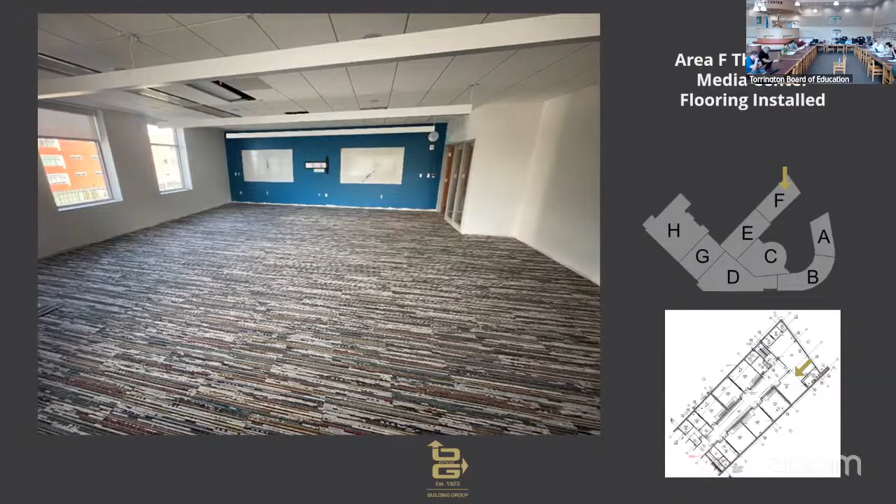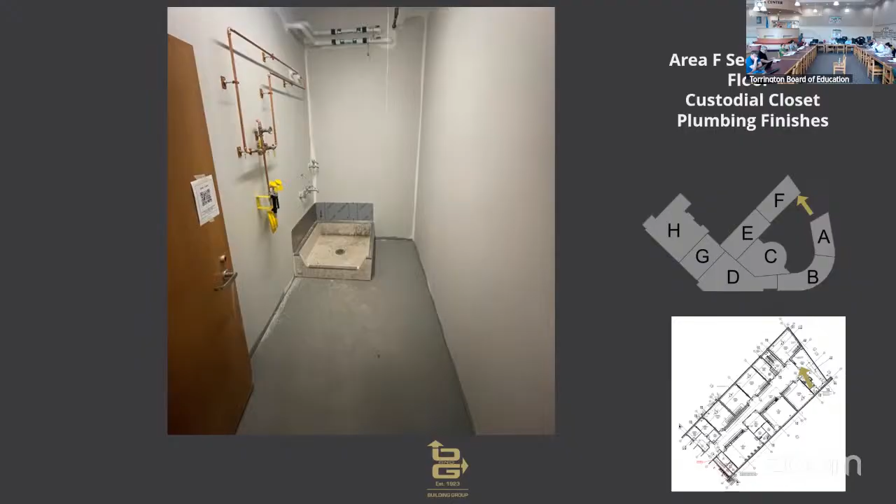We are final cleaned on the second and third floors in the middle school. What you're looking at here is the carpet installation in the presentation class zone area in the media center on the third floor. It's actually the same carpet that was installed in the high school media center, but the carpeting is complete and the final base work remains in progress. Next slide is showing a typical custodial closet with the mop sink and the eye wash station. The work that remains here is the insulation jacketing on the exposed copper piping, the vinyl base, and the mop holder accessory. As I had mentioned before, final cleaning is complete on the second and third floors.

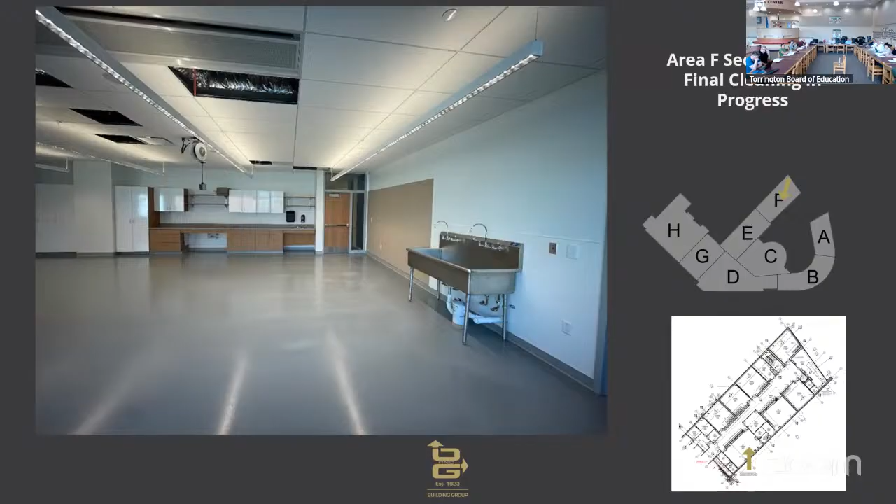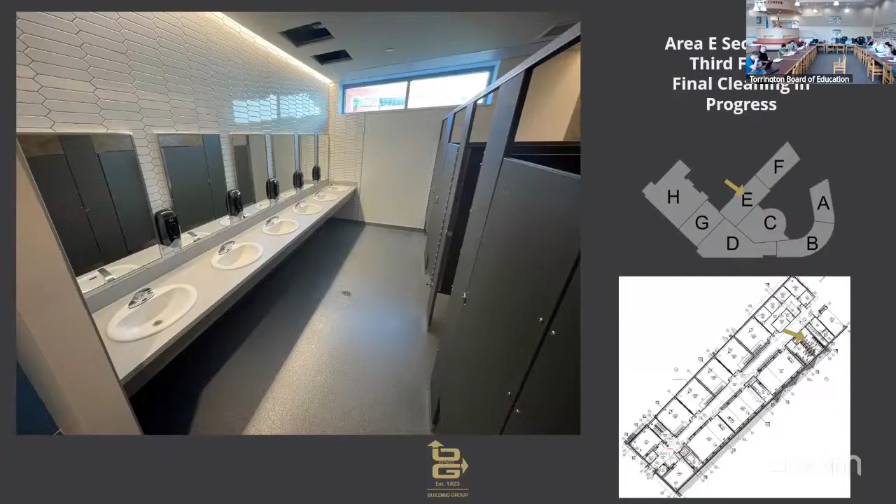Here's a picture of just the recently cleaned art studio classroom on the second floor of Area F. And the next slide is showing the community restroom on the same floor in the same area. Just for a real-time update, the window contractor, Cherry Hill, has also begun cleaning windows on the inside of the building as well. Flooring installations have progressed significantly in the middle school. The picture here is showing completion of the corridor flooring on the second floor, and it's the same condition the floor above, minus the vinyl base installation. As of today, the corridor flooring on the first floor has approached the vestibule area and is nearing completion. Also shown in the picture here is the completion of the acoustical ceiling tiles on the second and third floors.

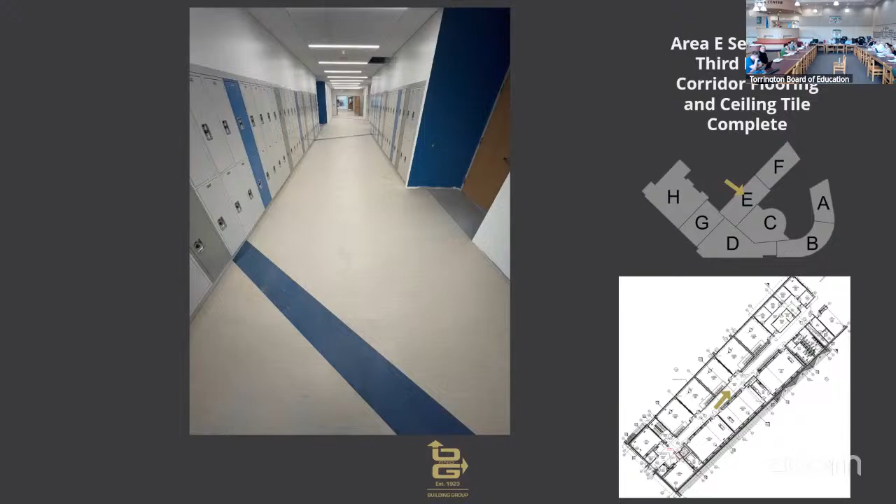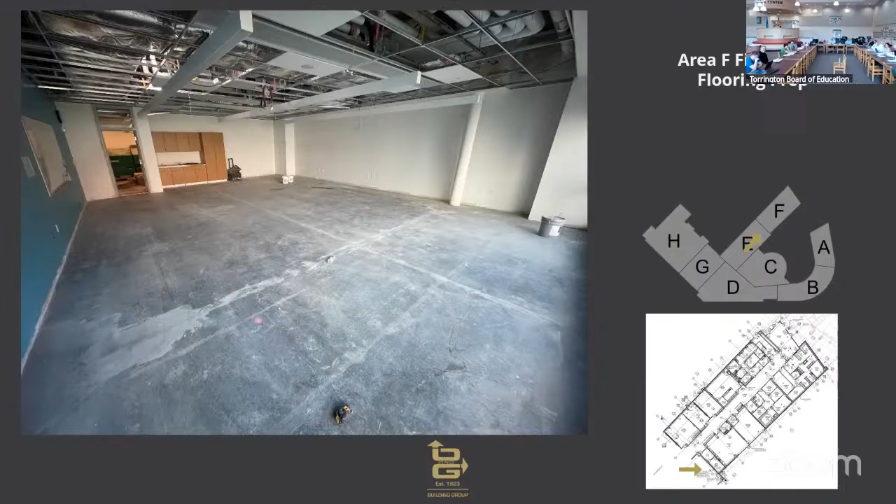Yesterday, we received approval from the local building officials to pad out the ceilings on the first floor of Area F. That's the last area that we're seeing out the rest of the middle school. So those ceilings will begin to close and final cleaning will follow, along with development of punch list and completion of punch list. Next slide here is just showing some floor preparation on the first floor of Area F classroom. This room is actually complete as of today's date, but the picture was taken at an earlier date. Just showing some more progress there.

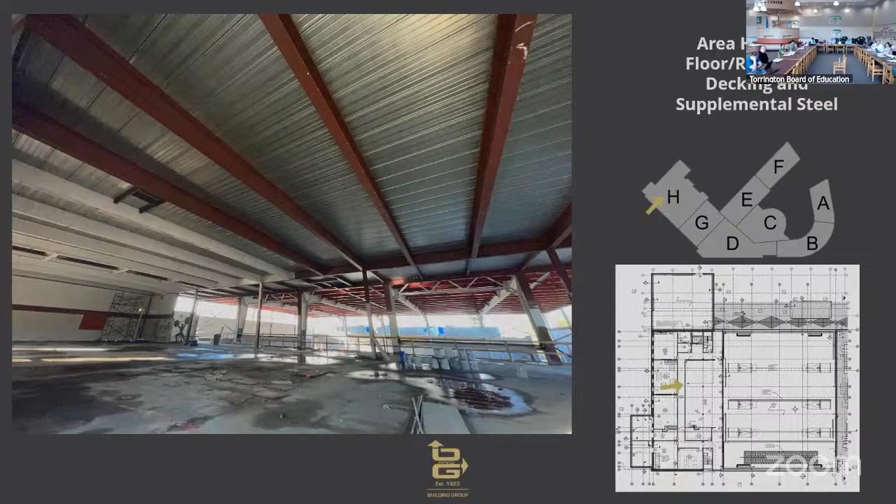Moving on to the final new concrete foundations for the project. Here's a picture taken looking down the gym lobby corridor, and the basketball base is located on the left side of the page. You can see it kind of jogs out. As of today, the slab for the gym lobby continuation and the auto shop is scheduled to be placed next week, weather pending, and the final new structural steel will start next Thursday, the 22nd. Again, just more major milestones happening in real time as the project progresses forward.

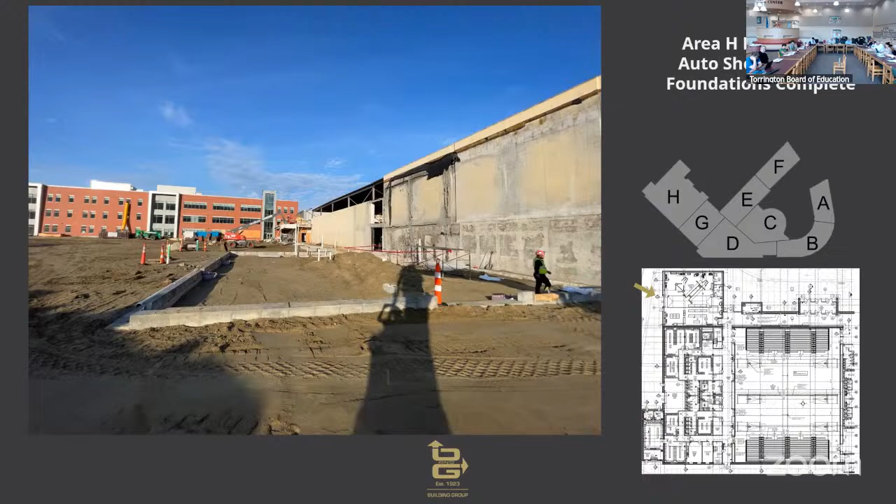Here's some progress showing athletic field topsoil stripping looking north. Lots of topsoil piles scattered around this area, but the city is actively loading and hauling out the excess.

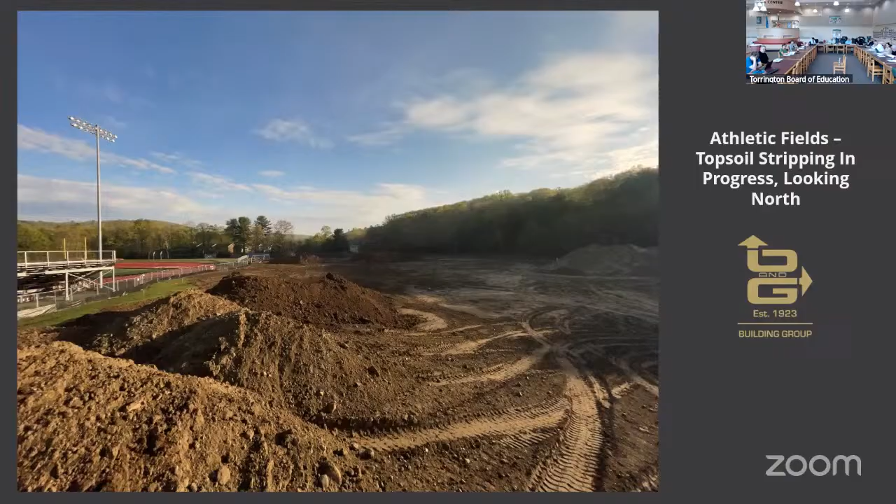They're gonna take it off? Up to this point? Until they cry uncle. Yeah. Okay, right on. Well, I didn't know if we're gonna take it all or up to a certain point, because that's a lot of topsoil. Yeah, to clarify your point though, not all of it goes off-site. What we need to keep on-site for the future work stays on-site. Right. I'm talking about the excess. Yeah, that's all going. Okay.

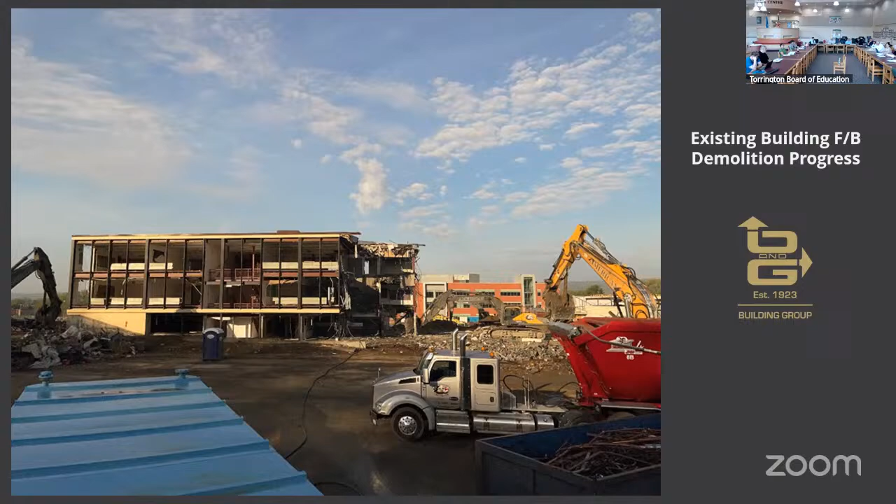Just to report on some cost impacts within the period, at time of bid, the general trades contractor was assigned with replacing the existing concrete slabs that were required to be removed in sections to facilitate the new underground plumbing piping in the existing locker room area. During removal of the concrete slabs, we encountered some unforeseen conditions related to the existing tunnel system that were not identified on the structural drawings, along with being left with slivers of existing slabs that cannot be doweled into without busting it apart, to tie in the existing slab into the new replacement slab.

Ultimately, the scope of work went from a trench replacement to a slab replacement, so changing the responsibility from the general trades contractor to the concrete contractor. Order of magnitude for the scope reassignment is around $30,000 being applied to the CM contingency fund.

I briefly touched upon it there, but we're continuing to battle with time and recovery related to the turnover of Area H. As I had mentioned during last month's committee meeting, we got off pace with the demolition handoff to the successor trades that are following those activities. Concrete and steel subcontractors have been working premium hours over the last month to gain as much time as possible.

Unforeseen conditions related to the tunnel closure walls, like I had mentioned, have consumed a lot of time, delaying slab placement until tomorrow, which was a few weeks over what we had originally anticipated. More unforeseen existing conditions are being resolved in communication with SLAM's structural team. A few others to mention were the discovery of the undersized steel beams in the old concession bump out area. The drawing noted the existing beams were larger than what was discovered in the field.

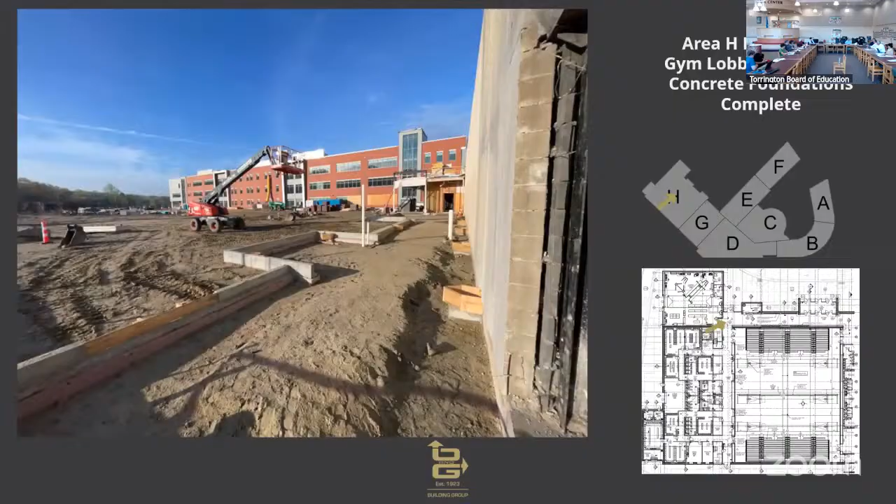What we're very excited about, frankly, is that we'll see a slab. We opened up that building. It's been open in those trenches that you saw in the pictures. That's the multi-layered storm and sanitary piping that's literally taken almost a month to get in the ground and backfilled up. And now vapor barriers are in place, dowels are in place, and we're ready to pour tomorrow morning at 7:30.

Any other questions? Yeah. Dan, what do you anticipate these premium hours, 6-day shifts, what costs are you anticipating taking to the project for? Well, the initial effort by the structural steel contractor and some of the work by the excavation contractor, we attributed to the delay by this selective demolition. So we had our low bid, American Environmental, as our abatement demolition contractor. They didn't hit their dates. They were put on notice, and they are now incurring the premium labor cost for the first 3 weeks or so of that work.

I don't know if you've thrown a number together for, cumulatively, between the concrete and steel contractor, or no, just going forward, the part that will hit as part of the contingency of the job. I'd say 10 grand. Yeah, I mean, a little higher. It's not 6 digits. I mean, when you think of it, it's less than, you know, 20. Like a ballpark is $25 to $30 an hour, worst case scenario, for the premium portion. You can rack up a lot of hours for not a big bill.

And that's the benefit here, is that when you're running premium and the crew sizes are smaller, like if I have a structural steel crew out there, they're not 20 guys, they're only 6, you're not incurring a lot of cost. It's when we get to premium when I have, right now we're back up to about 55 people every day. As we move forward into July and August, we're gonna be up to 70 people. It's when you're paying all those guys premium. So that's where we would try to capture it as early in the process as possible, as well as using a second shift instead of premium hours.

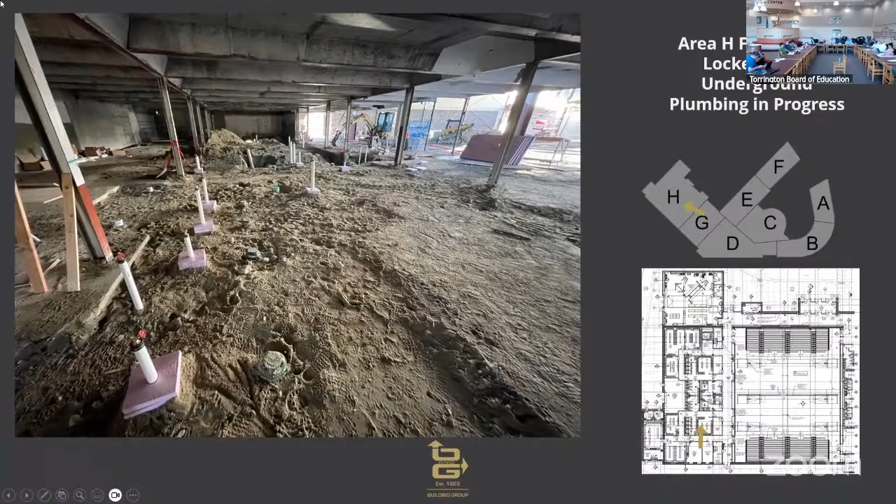John? Good evening. As construction kind of kicks up and demolition starts to slow down, there's more testing and inspection going on. Right now, we're up to field report 108. We're tracking 23 items and met with O&G the other day to go over a strategy to get them done. The majority of those are going to be taken care of over the summertime when classes are out. There hasn't been a CES report. Nash did come out and issue a field report, and they do the civil side of things, and they didn't cite anything unusual in their report.

Special inspections, which are looking at foundations, concrete, reinforcing, and steel. They had several reports. They reviewed and inspected the reinforcing in building part H, which you saw the foundations for, and there were no issues. The steel roof deck that Dan mentioned was inspected, and there were no non-conforming issues. They've done some concrete tests, and they're all coming up to at least 25% above their design capacity. We're using what's called high early strength. We don't have time for 28 days. It's not part of the project.

The fact that we're pouring concrete foundations a week ago and standing steel on them middle of next week, we have to use high early strength concrete. Right out of the gate, they all came up to strength. 7-day breaks were all at 100%. They're looking good. Normally for 4,000, you're waiting your 28 days before you could put steel on it, but in this case, they're able to get on it within 7 days.

So Tri-State's been doing those tests and inspections. There hasn't been an IES commissioning. There's nothing to commission just yet, but there has been some startup testing. Your 681 new data drops that are in the middle school were tested and they all passed. Testing and balancing is ongoing not only in the middle school, it's also continuing in the high school. That should be wrapping up.